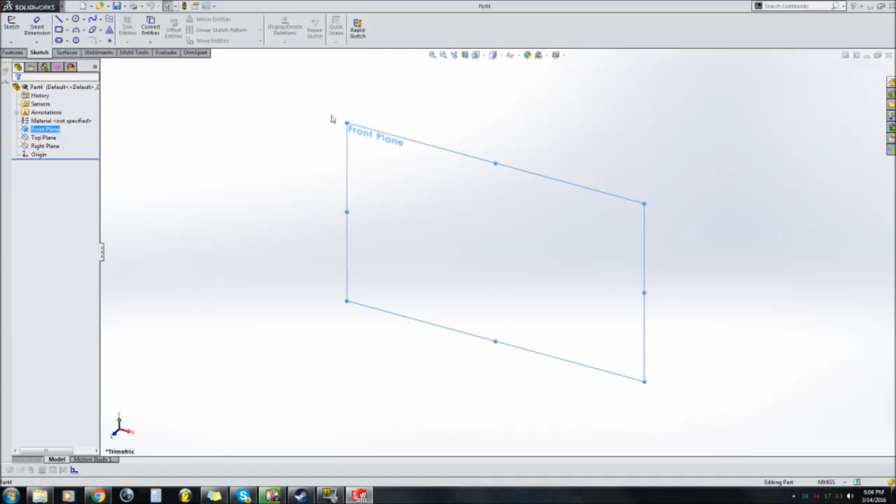Alright, so I've decided to make a little tutorial on how to draw compressor wheels for turbochargers. Haven't found any good tutorials out there. All the other ones I've seen don't really look too nice, and they don't really look like what you'd find on an actual turbocharger. So here I am showing you how to do one.

So basically you want to start drawing on the front plane. Draw a nice little center line down the middle for reference and for the revolve that we're going to make in a second. So I want to set the height of my compressor wheel first by this line parallel to, or coincident with, the center line I just drew, so that's going to be 50 millimeters.

I'm not really drawing this based on a real compressor wheel, just to my dimensions. I'm going to make it 45, let's say, so it's a 90 millimeter diameter, 45 radius on that. On the top I'm going to make the center roughly, let's say 7 millimeters.

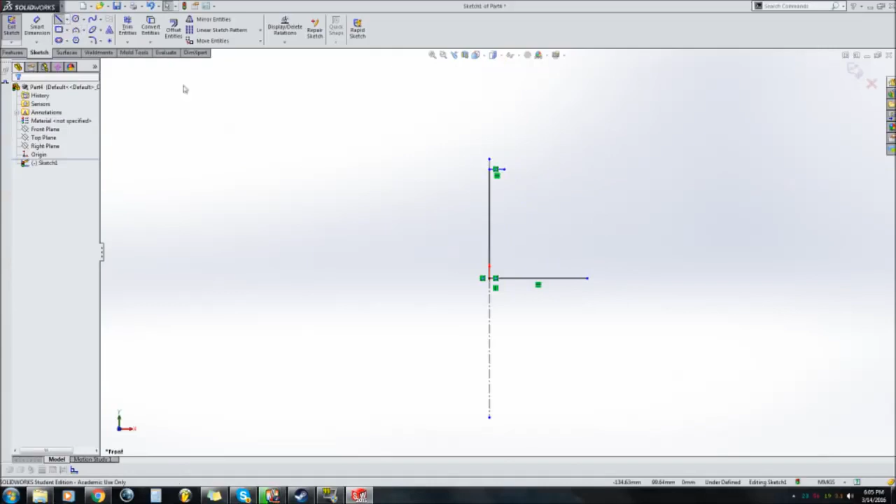And then I'm going to make an arc right here. Actually no, that's not right. Alright, let's make this for a super back compressor wheel. I'm just doing this little extra thing here, so I'm going to do 4 millimeters here, just because for a super back compressor wheel the base isn't flat. It has a little arc here, if that makes sense, to make the back of the compressor wheel. If you know turbos, you'll know what I'm talking about.

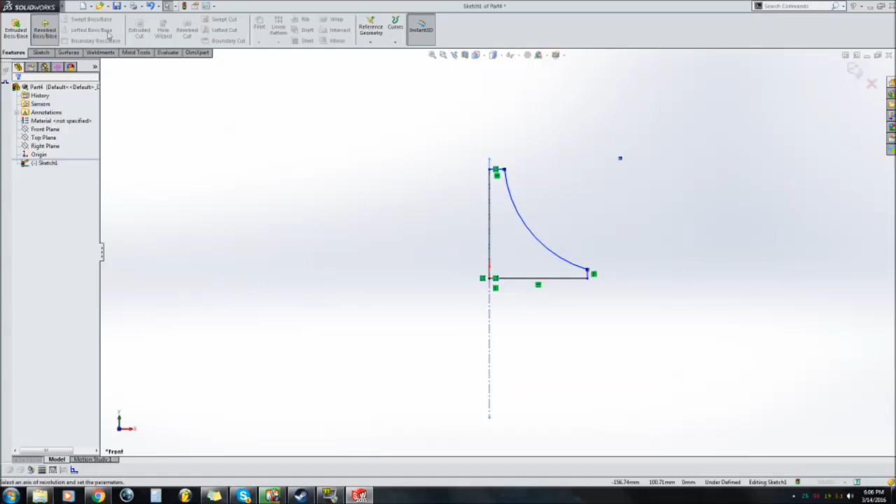But yeah, basically that's just going to be my profile for my center cone, and we're going to do a revolved boss base. Should create this. If not, you got to select your axis of revolution as the center line here, and then you have to have your closed profile there. So there's our center cone. That's very basic, that's how it looks from the side. There's no super back profile yet, I'm gonna revolve cut that later.

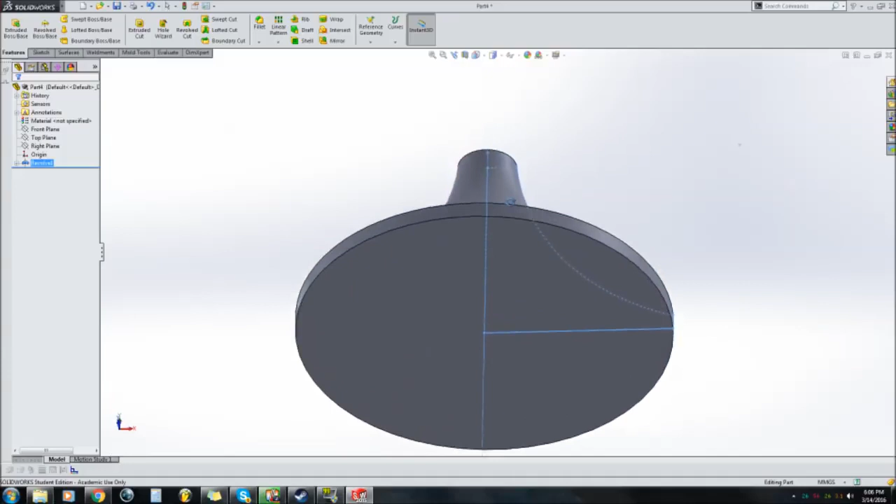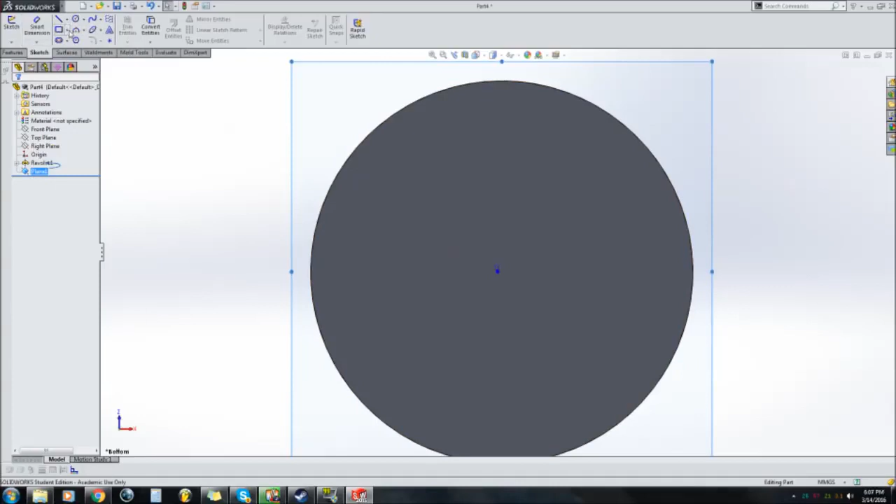So next thing you want to do is create a plane on the bottom. So reference geometry, plane, and then make it 0 millimeters spaced away from the bottom, so it's like that. And then you want to view the bottom face like so. And now all we have to do is select this plane. We can do a 3-point arc.

This is very rough. If you want to make a really nice looking compressor wheel, you're gonna have to do it a bit differently—you're gonna have to actually measure everything. I'm just kind of drawing this free-handed. So this right here is going to be the curve of the bottom of the blade. The part that, well in this case, doesn't scoop air in, it kind of throws air out to the side, so you want to make it curved like this.

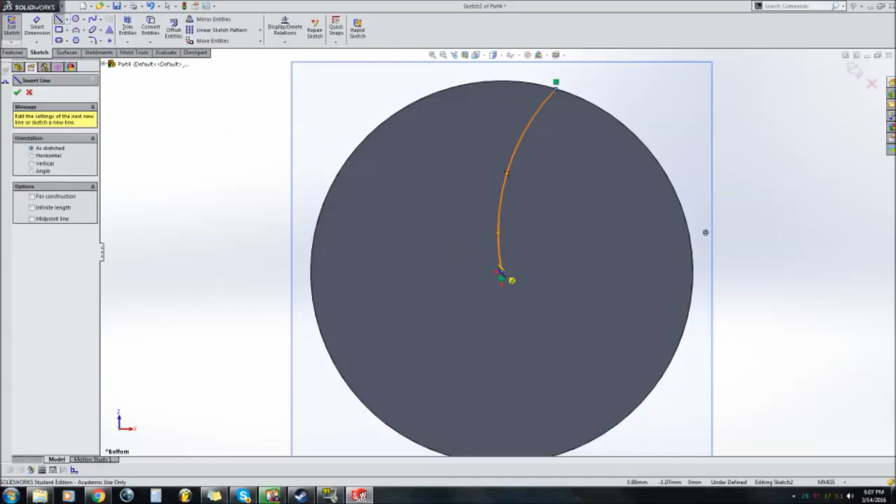So yeah, that's about good. And then the next line here, I'll make a line just to make it a proper dimension. Just do it like this. So this line here specifies the thickness of the blade at the bottom, so I'm gonna do a 1.5 millimeter thick blade. So I'm just gonna do 1.5 millimeters here too. It's not exact by any means, but you get the principle.

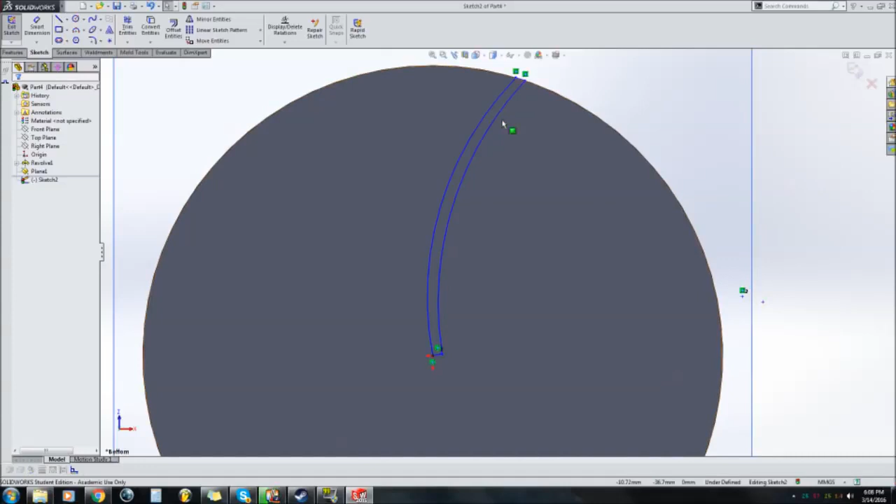So basically I can draw another arc right here and make that roughly the same. If you want, you can draw other lines in between here just to make it more exact, but that's basically it for the bottom—that's the blade profile for the bottom. Very simple. Back to isometric view here. That's how it looks, I'm gonna go ahead and exit the sketch.

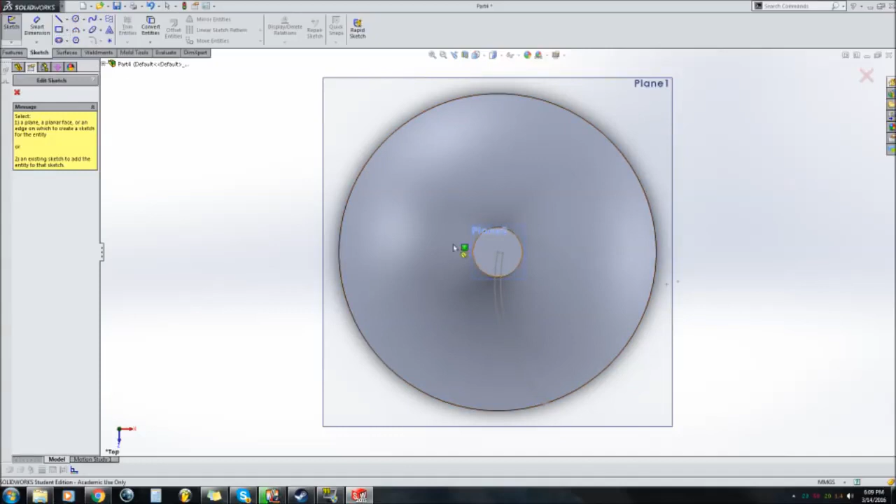So right now we want to make another plane for the top, which is going to be right here. We want to make it right up against the top again, and then we can view it from the top view. Now right here, the top of a compressor wheel, the blades, the edges are usually squared off, they're not curved like at the bottom, so you can just use a rectangle. It's very easy. So yeah, we're drawing on plane number 2.

I'm just going to go ahead and make it right up to the edge because we're going to revolve cut this entire thing after. And the thickness at the top, I'm going to make it like 0.8 millimeters, very, very small. Oops, I messed that up.

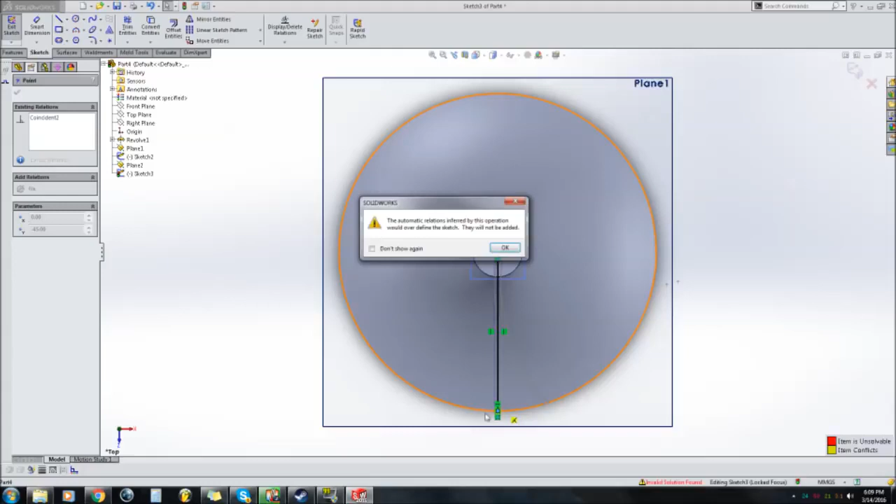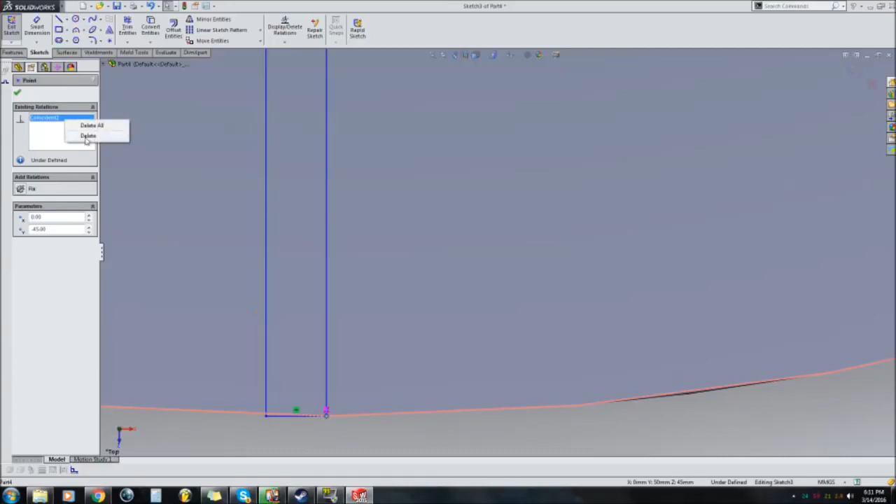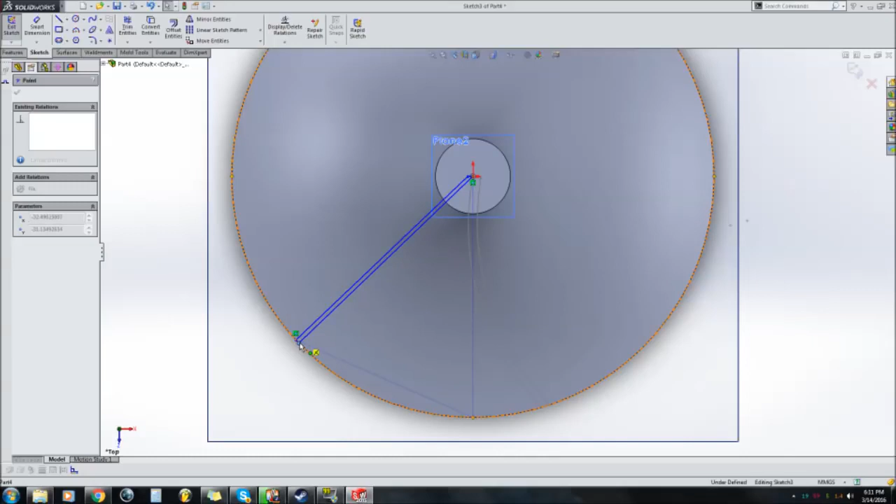So for this line, you want to take the relations out—remove the vertical here. You don't want any relations for these lines because I just want to free drag it essentially. So coincident for this point, delete that. Delete the horizontal there. We want this point coincident because we want it to rotate around the axis, but I'm just going to drag it around like this because it's easy. This point here will automatically coincide with the edge there, and I'm just dragging it like that to make it relatively the right angle away from the bottom.

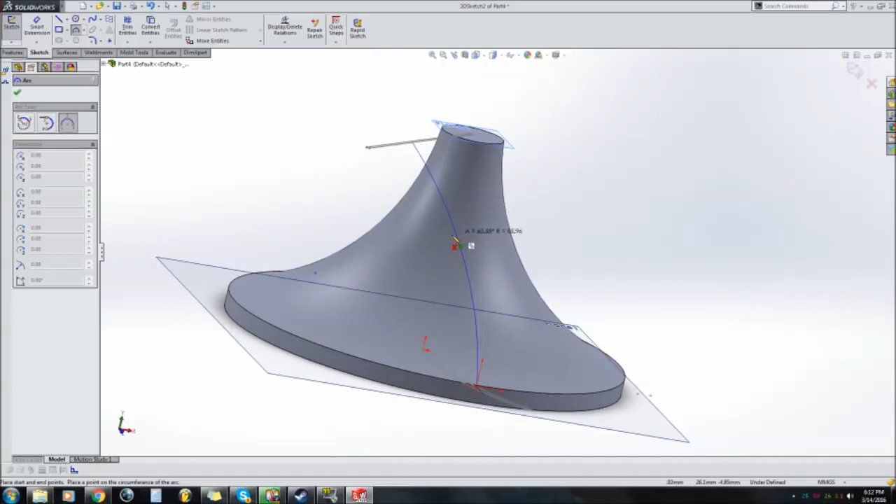So once that's done, you can exit the sketch again, and then this is where you're actually drawing the blade profile—the loft of the blade, if that makes any sense. So I'm doing a 3D sketch with an arc, hang on, I keep exiting it. So, 3D sketch with an arc. I'm just going to draw a line from this point right up to this point here, and it's basically going to be a nice curve like that. You can see that there. This isn't very exact, you can draw it on a plane.

You can make a plane that you can draw this arc on to make it precise, but you don't have to. This is just the way I like to do it, for tutorial purposes. But I'm going to exit that sketch here.

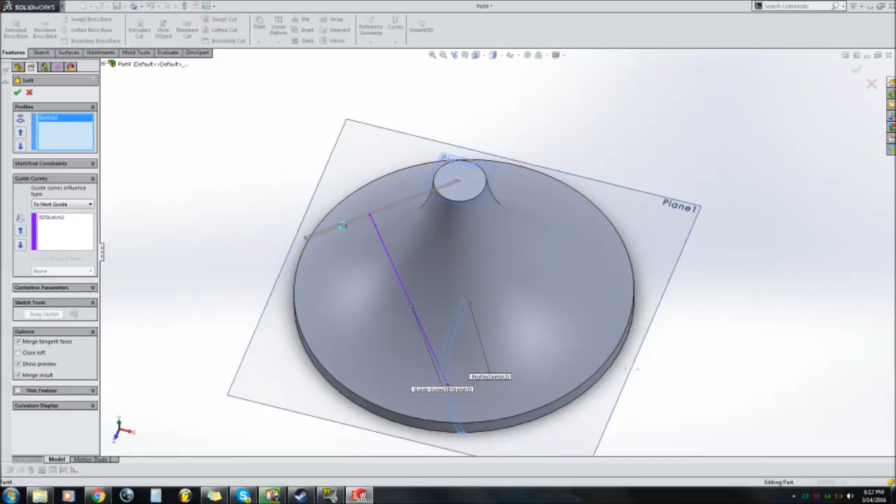Now we're going to go to lofted boss base, and it already selected this line as a guide curve, so we can select the bottom profile here and then the top profile, and it should draw us a nice blade like that, a nice loft. Once you have that and you're happy with it, you can finish it, and that's one of your blades.

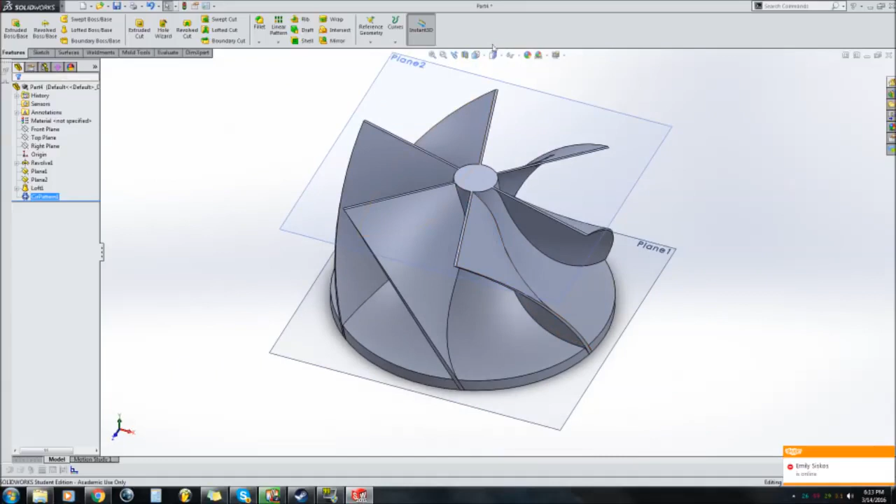To do the rest of the blades, you want to click that blade and then go to circular pattern. I selected sketch 1 because that had a center line as a revolve base for the blades. This is only a 6 blade, but I want it to be a 12 blade, so I'll do that again.

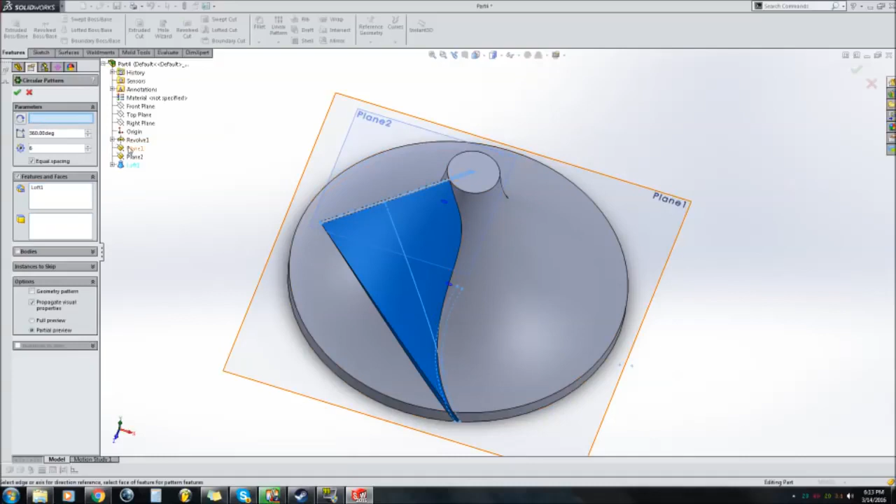So selecting the features and faces, loft 1, for our circular pattern, then parameters right there for the axis of rotation. I'm selecting this center line right here, so it's going to revolve around that center line. Basically I want 12 blades, so I'll type in 12 here, 360 degrees of rotation, and then...

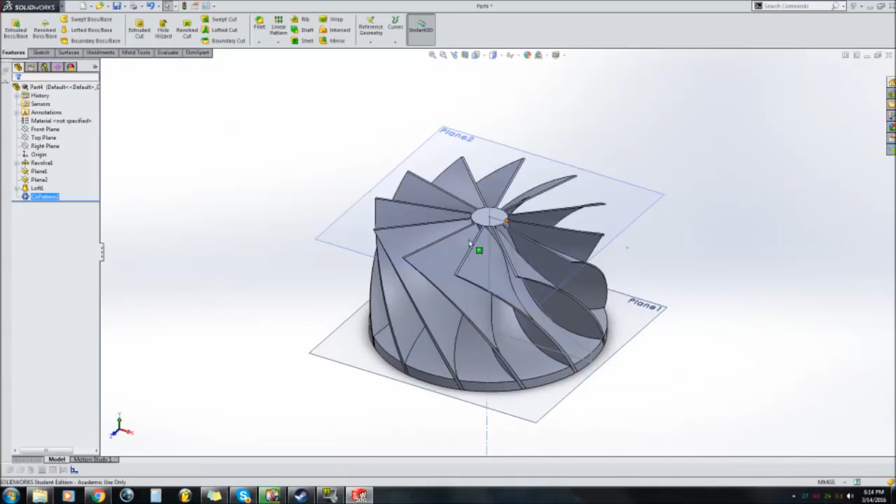There are our compressor blades.

Now to get the actual shape of a compressor wheel, you go to front view, and I like to do section view and cut it in half. Here you can actually draw the profile of the blade you want to cut, like a revolve cut out of this drawing. So you can select the front plane to draw on, and then you're going to draw all the parts that you want to cut out of the drawing.

Like I was saying before, this is going to be a super back blade. So the bottom base, let's say 8 millimeters here, and then this is going to curve up to about here. Notice I'm being really approximate.

We don't want to revolve cut this spot right here. Actually, maybe we do - we want to make the blade stick out a bit. So I'm going to do it to about there. I'm going to draw this line up to about right here, and then I'm going to...

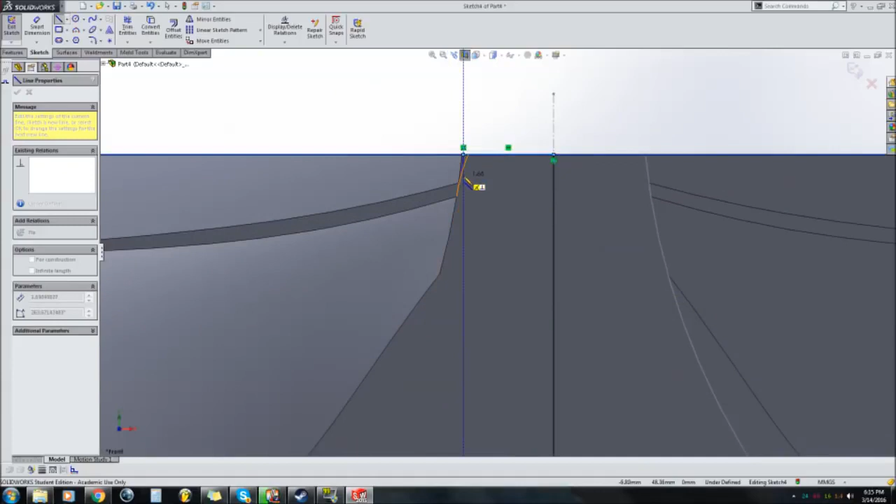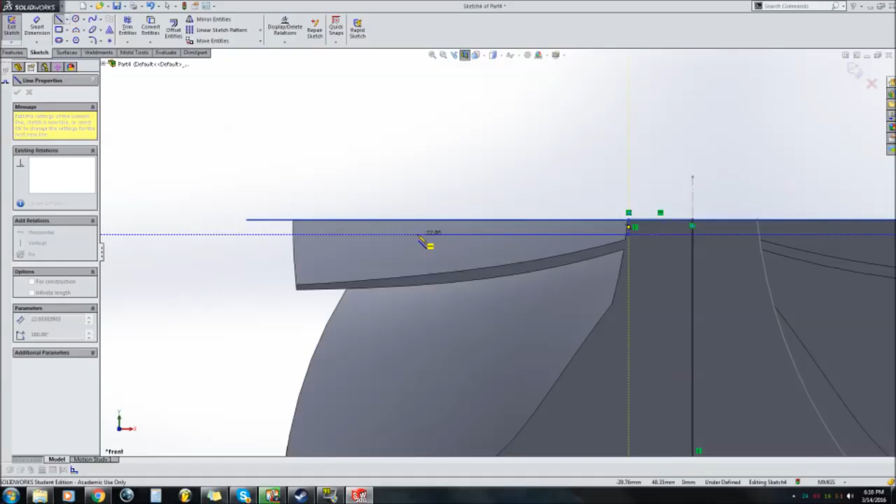Draw another line with the center line, out to about here. Draw another one slightly down so the blades don't go all the way to the edge. I'm going to draw this line to about... let's just see how wide this is actually going to be. I want it to be about 60 millimeters, so it's 30 out, right about there. Again, this is very approximate. This isn't how you should actually draw a real compressor wheel if you're going to machine it.

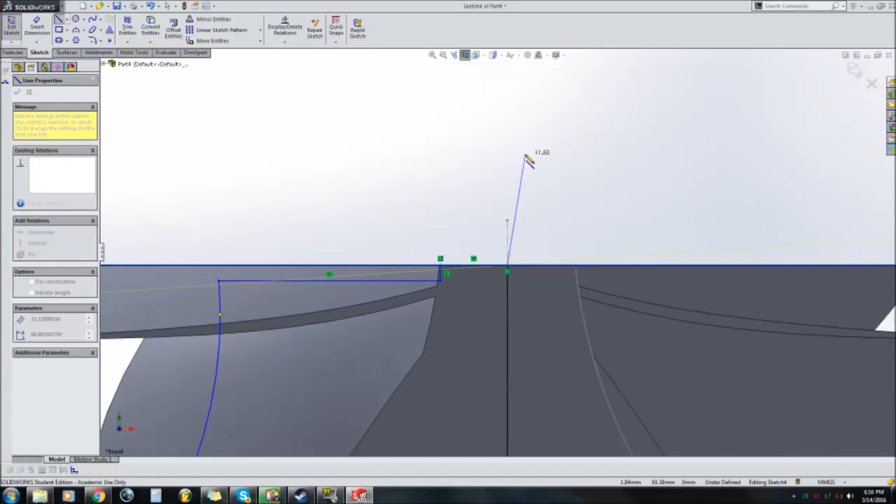And here's our curve for our blade profile. In order to cut this out, we need to draw a line like that, go all the way around, come down, go to here, and then connect it. So basically we're cutting all of this stuff out in this area.

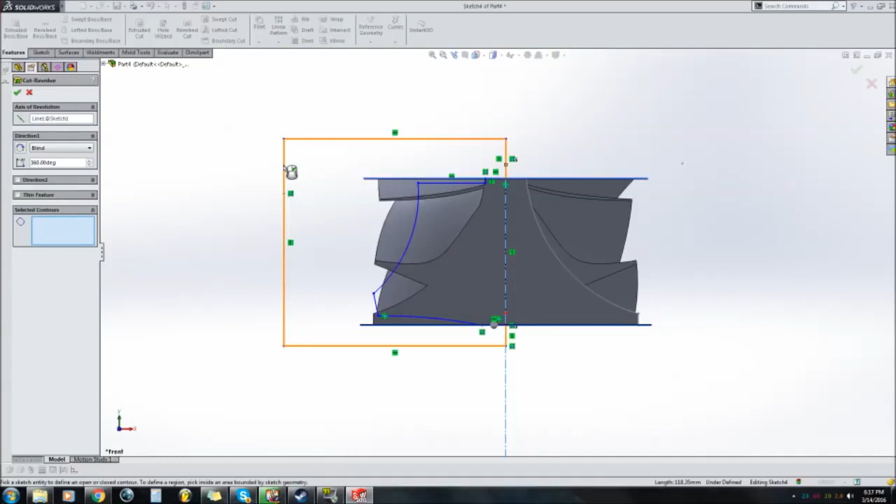So I don't even have to exit that sketch - I'm just going to go straight to revolved cut and select the axis again right there, selected contours, this, and then there we go - select just that region, and it's going to select the 360 degree shape of what we drew here.

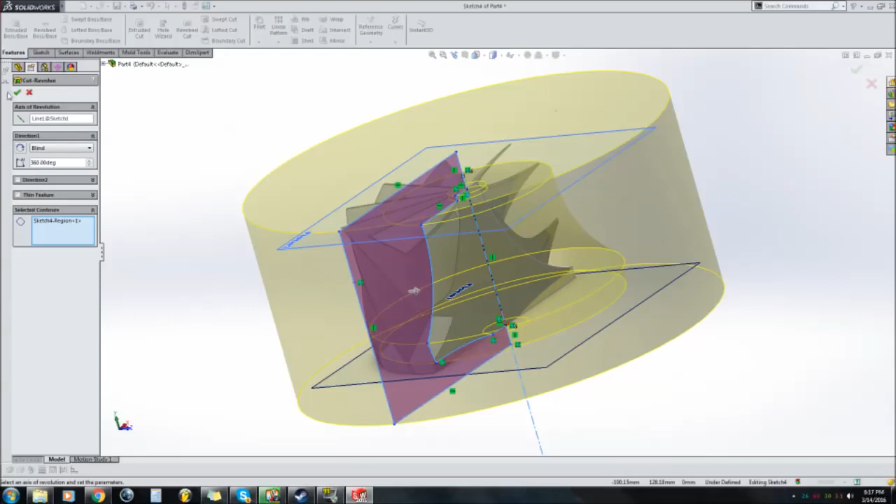I apologize if I'm not making any sense, but yeah - basically that's our cutout compressor wheel. It looks kind of weird, not really the exact shape you'd want, but it's got extended tips. This is really useful for modern compressor wheels because it gives more flow.

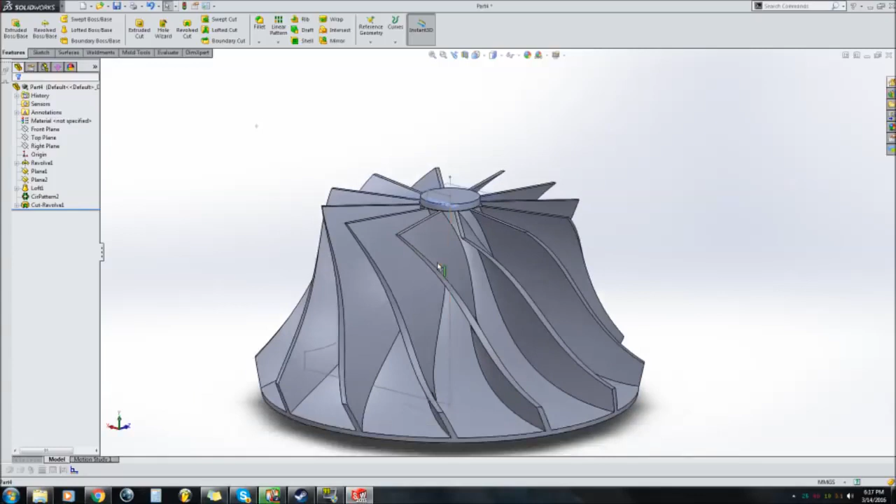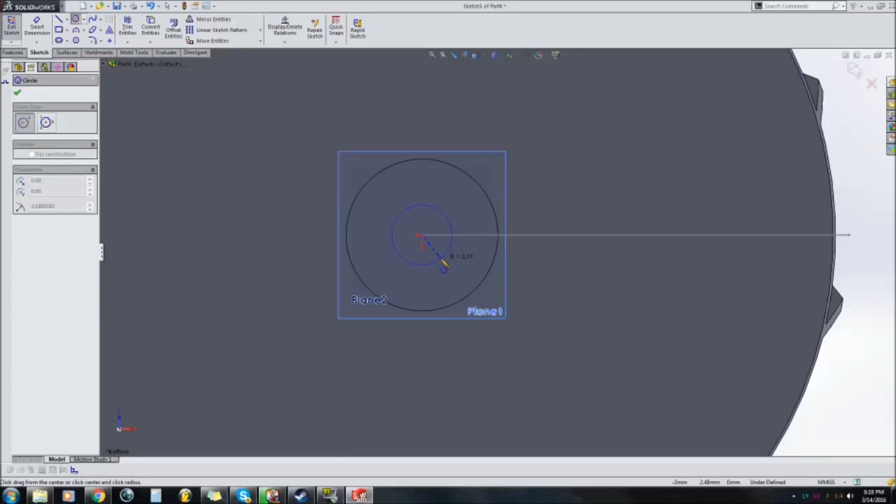So yeah, basically that's that. Another thing I'm going to do is on this plane at the bottom, I'm just going to draw a circle to extrude as the shaft hole, where the hole where the shaft goes through essentially. I'll make that around 3 millimeters in radius, so 6 in diameter. Then I'm going to do extruded cut, through all, and there we go - there's our hole in the top of the compressor.

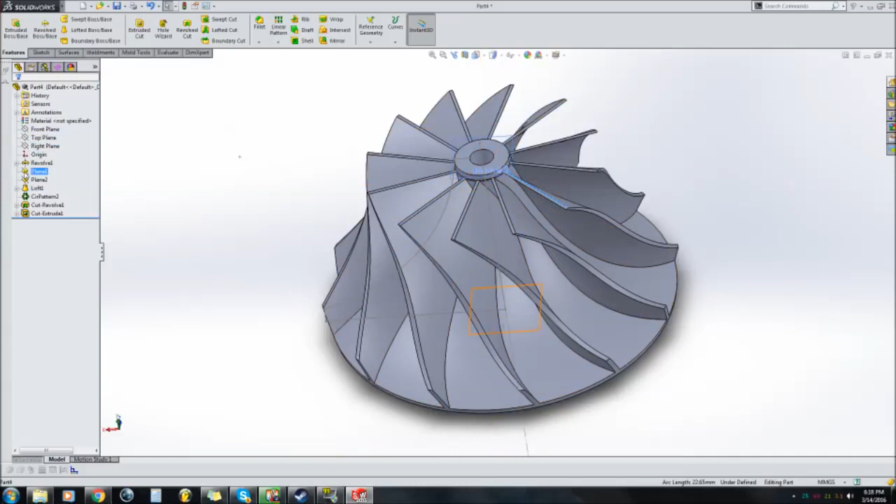And then I'm going to hide the planes, hide all my drawings just so you can see that better. And basically there's a compressor wheel, just like that. Very easy to draw.